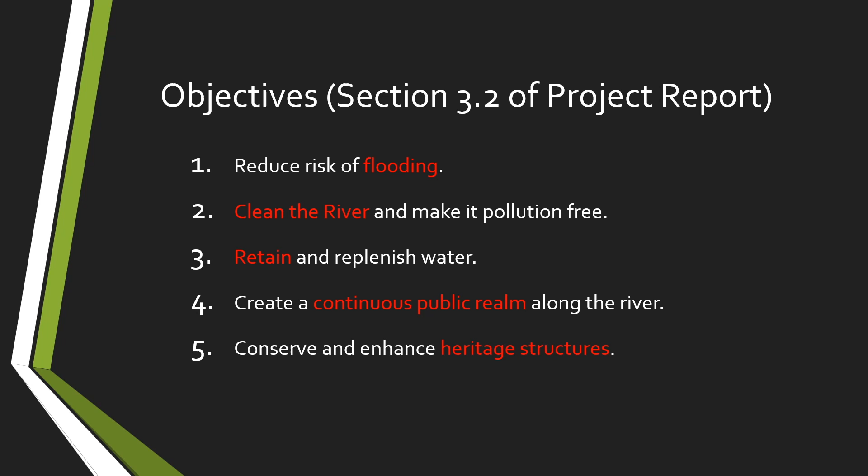But before that, let us see the present status of the river. As of now, water supply to the city from various dams is 1350 MLD, that is million liters per day. As per our estimate, groundwater extraction every day is 310 million liters. So total consumption is 1660 MLD. As per CPCB norms, 80% of the consumption gets converted into wastewater, that is sewage. So as per their norms, our sewage generation every day is 1328 MLD.

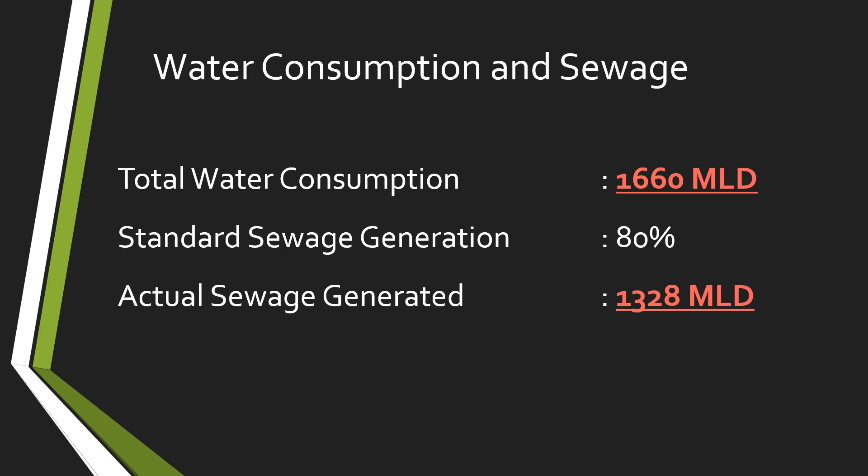As of now, our sewage treatment capacity is 507 MLD. Current sewage treatment capacity of all operating STPs of corporation. They have proposed a new project, that is JICA, you mentioned some time back. Total capacity, proposed capacity of JICA is 396 MLD. Current capacity plus proposed capacity, it comes to 903 MLD.

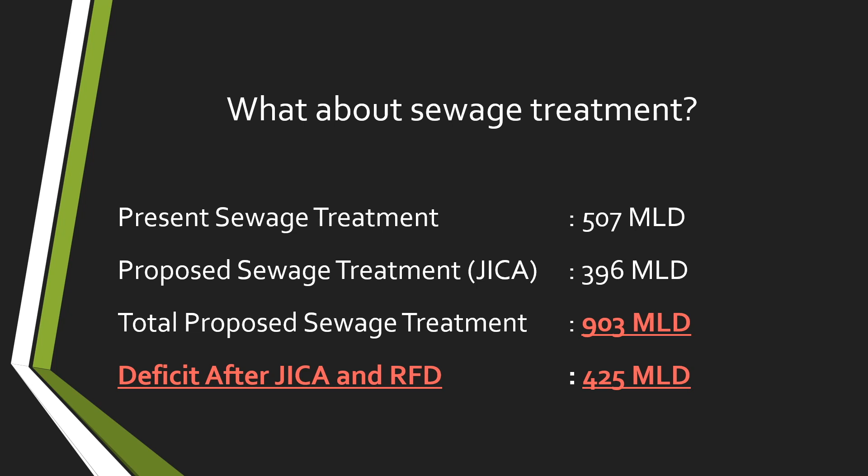But even after completion of JICA, which is going to be completed in, say, the next 5 years' time, keep aside increase in population, keep aside increase in daily consumption of water, even if we consider today's sewage generation, there will be a deficit of 425 MLD in sewage treatment. So, even after completing JICA project, we would be discharging 425 MLD, that is 42,500 tankers of raw sewage in the river every day. In short, even after completion of these projects, the water in the river is going to remain highly polluted.

We must think of the impacts we are causing on the downstream side, particularly Ujni Dam. On the downstream, it is Ujni Dam on Bhima River. Mula Mutha is a tributary of Bhima. Only one species of fish can survive, that is tilapia. And it can survive practically in sewage. Earlier there were 70 species. Now only one species survives. And that also is not a native one.

The fishermen are suffering with innumerable skin disorders. The water cannot be used for agriculture purpose. Cattle are suffering from various diseases because they drink this water. Not only that, even the human beings, particularly this belt is now being known as kidney stone belt, because there are many cases of kidney stone. Then digestive system disorders, particularly cancers of digestive system and impotency. These disorders are rising on the downstream side. That is mainly because of the pollution we are discharging, and in a way, Pune and Pimpri-Chinchwad is responsible for this.

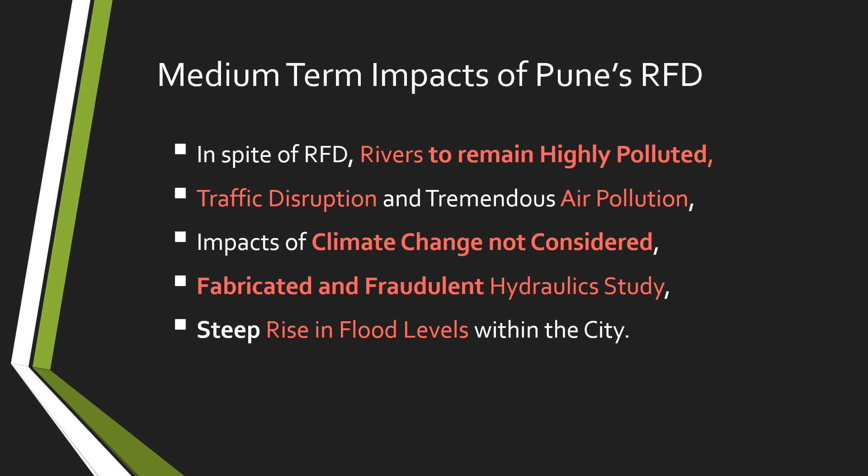So what are the impacts of this project? In spite of riverfront development, as I have explained, rivers remain highly polluted, traffic disruption and tremendous air pollution, impacts of climate change are not considered at all, fabricated and fraudulent hydraulic study, steep rise in flood levels within the city, flawed environmental clearance, depletion of groundwater, irreversible destruction of biodiversity, floodlines illegally shifted to accommodate riverfront development, and monetization of river lands and public resources just to fund this project. So let us go into it one by one. City traffic disruption and rise in air pollution.

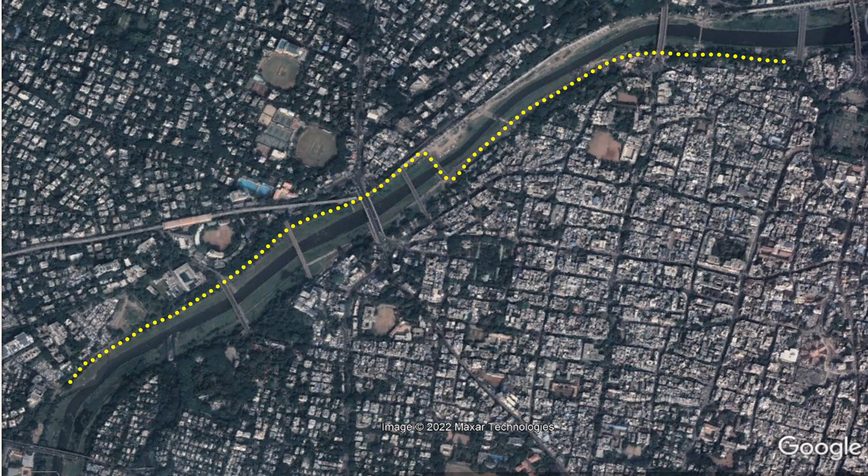This is Lakdi Pool. Malum hai na Lakdi Pool? Yeah. This is, in a way, the center of the city. These are the petas. This is the old core city. You can see this is Shaniwar Wada. Okay, this is Jangli Maharaj Road. This is Ferguson Road. This is Karve Road. Okay, and this is Mutha River. It flows in this direction. Right? See the bridges 1, 2, 3, 4, 5, 6, 7, 8, 9. 9 bridges are there in one frame.

Now, this is a riverbed road. It starts, this is Mhatre Bridge. It starts from here, comes up to, this is Baba Bhide Pool near Jangli Maharaj Road. Then it goes like this almost up to Shaniwar Wada. And in the morning, thousands of two-wheelers, mostly two-wheelers, cars also, travel from this end to this end. I mean, from the Kothrud area, Erandwane area to the core city. Thousands of vehicles travel in this direction. And they come back in the evening.

Now, it's another question whether a road should be built in riverbed or not. That's a debatable question. But as of now, that road does exist and thousands of citizens use this road. I came by that road right now.

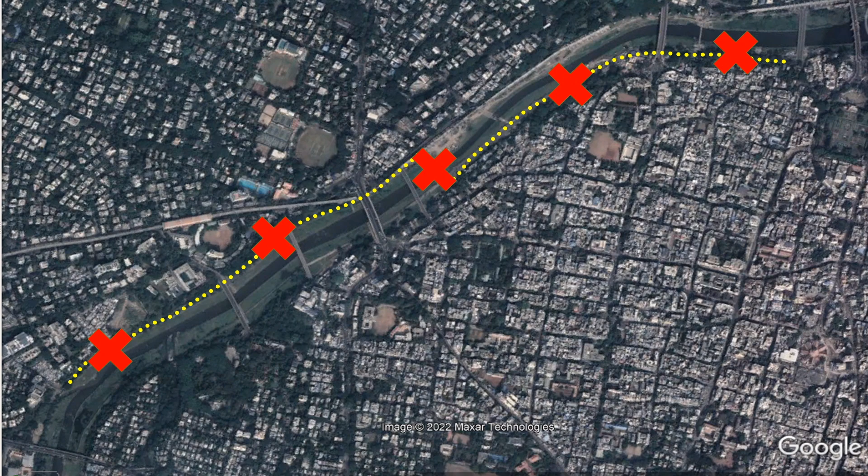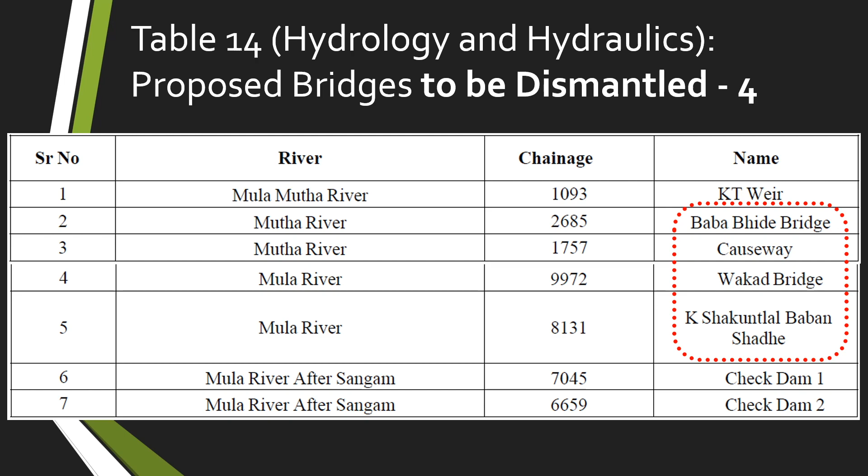Not only this, 4 bridges are going to be dismantled: 2 bridges on Mutha River, 2 bridges on Mula River. Now this is a table I had directly copy pasted from their DPR. This is not prepared by us. So one of them is Baba Bhide Bridge. So these bridges are going to be dismantled forever.

7 bridges are going to be elevated at the same location. Now they have not gone into details whether it is possible or not, what traffic obstruction it will cause, what disruption it will cause, whether it is possible, which technology needs to be adopted to elevate the bridges. Nobody has gone into those details.

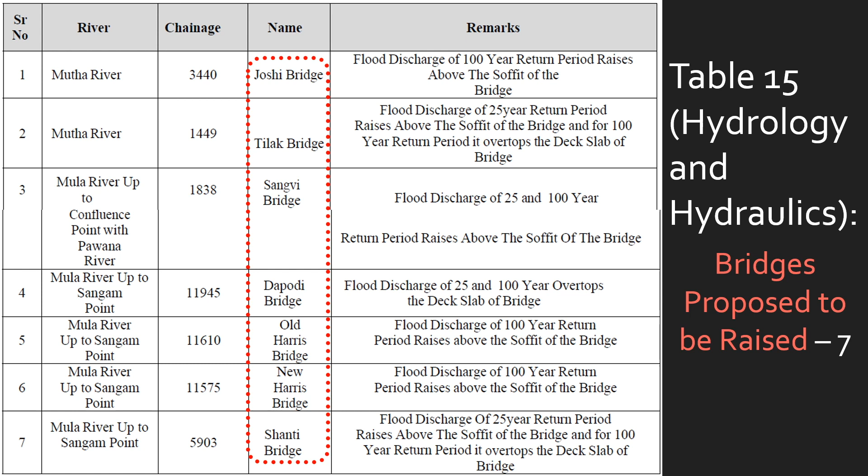Now let us see this Tilak Bridge. Tilak Bridge is a bridge just beside Pune Municipal Corporation. Now they have given water surface levels and details of the bridges also. This is Tilak Bridge. Bottom soffit of the bridge is at 545.98 meters. These levels are from mean sea level, MSL. So 545.98 meters above MSL.

And the output of Mutha River up to Sangam from HEC-RAS, that's a software they have used, for flood discharge of 100-year return period in channelized section. Channelized section means after completion of the project, they are going to channelize the river. So after completion of the project, at Tilak Bridge, WS elevation, water surface elevation, is going to be 547.93, almost you can say 548 meters.

Okay, so 546 meters and 548 meters. There is a difference of 2 meters. In short, you will have to elevate that bridge by 2 meters to see that it doesn't cause any obstruction, it doesn't cause any impediment to the flow of water.

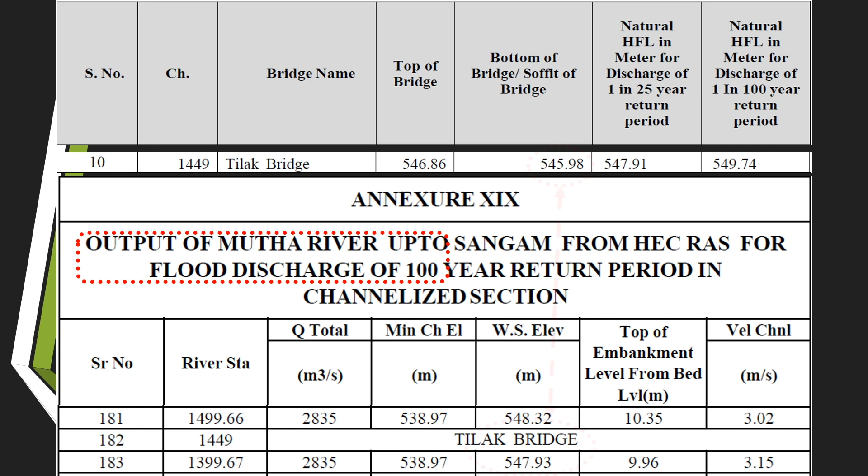Now, no consideration of climate change. In 2009, central government directed all state governments to study the impact of climate change in their own states and come out with their mitigation plans, adaptation plans. Maharashtra government gave that work to TERI, that is Pachauri's Institute in Delhi. They filed a report in 2014.

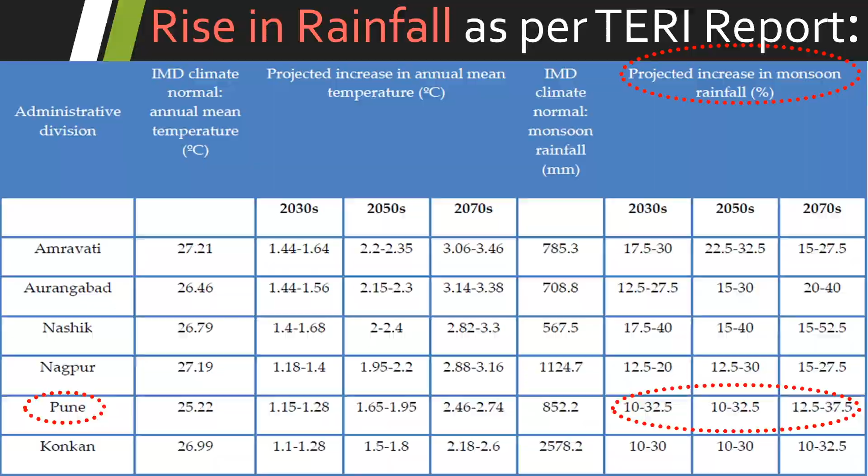In that report, they also have mentioned key recommendations for water resources sector: conservation and renaturalization of rivers and water bodies. Conservation and renaturalization of rivers. This project is completely diametrically opposite of this. There is no conservation and renaturalization.

Further, they also have said retain and conserve the riparian zones and renaturalize existing wetlands. Enhance native vegetation, formulate stringent policies to prevent the dumping of debris and waste in these zones. Retain and conserve riparian zones and renaturalize existing wetlands. They are completely reclaiming the wetlands by constructing walls and reclaiming the wetlands on the outer side of the wall. Hundreds of acres, if not thousands.

There will not be a single square foot of wetland. No native vegetation. And this project is nothing but dumping debris and construction on these wetlands and riparian zones. So it is totally violating these norms given in this report.

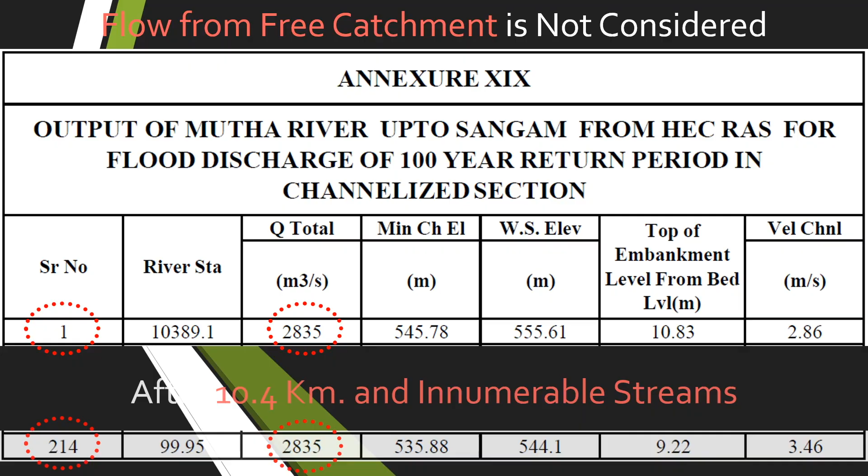See, this is the first reading of Mutha River. They have considered 2835 cubic meter per second, and this is the last reading after 10.4 kilometers. It's the same reading. In between, there are innumerable streams. I will tell you about one single stream, that is Ambil Odha. In 2019, Ambil Odha flooded and 26 people lost their lives. It has a maximum carrying capacity of 650 cumecs. One single stream, that is not considered, between this and this location. And there are many such streams. As per our calculations, the flow from free catchment area is more than the discharge of Khadakwasla Dam.

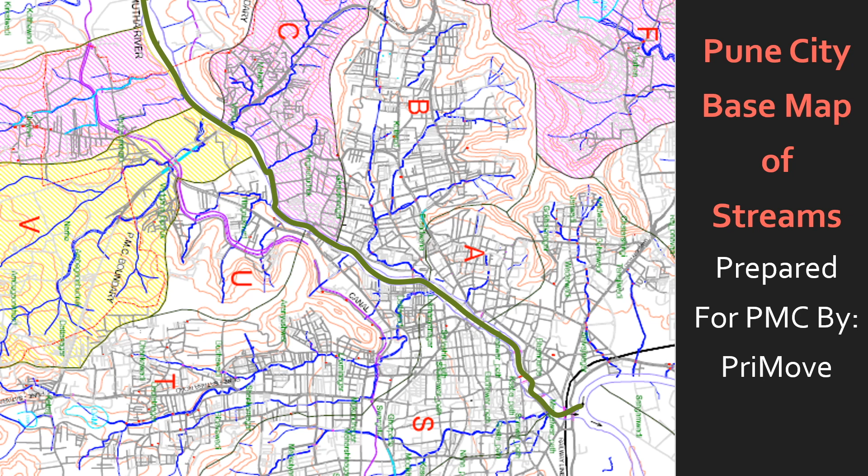So fine. This is Mutha River. This is Sangam. This is Mula River, and this is Mula Mutha River. See the streams. All these blue lines are various streams. This is a map prepared by PriMove organization for the corporation, so the corporation has all this map. They have not considered a single drop from all this area.

And what does the law say? This is the circular by Water Resources Department, dated 16th November 15. For demarcation of restrictive zone, that is the red line, flood to be considered is as under. This is for river without dam, and this is for river with dams, which is our situation. All these rivers have dams on the upstream side. Spillway design flood plus 100 years return period flood from the free catchment area below dam up to point of study. Spillway design flood means the peak discharge of the dam, and the 100-year flood from the free catchment area they have not considered at all, and they have accepted it.

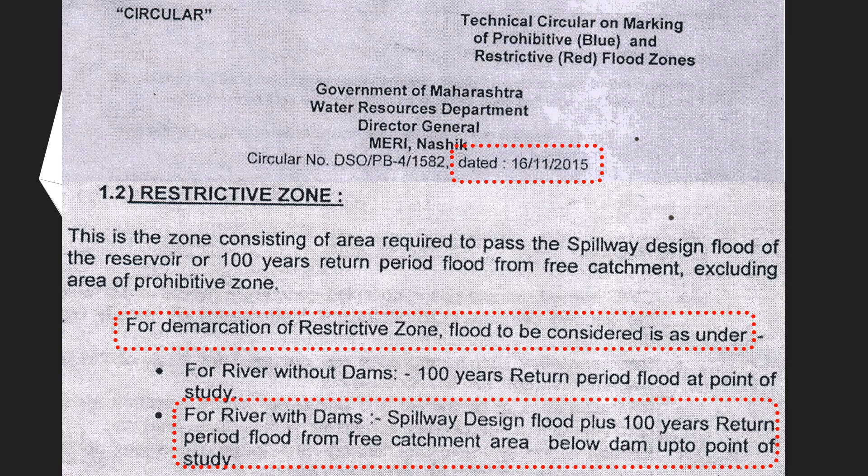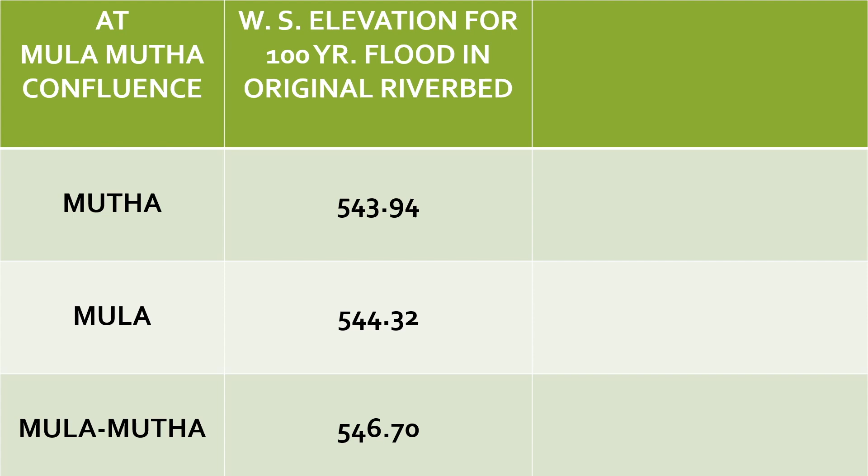They have that figure, but this is on the too conservative side. The actual figure is much more than this. But whatever it is, they have not considered anything from this. So how can you expect that the flood levels will recede?

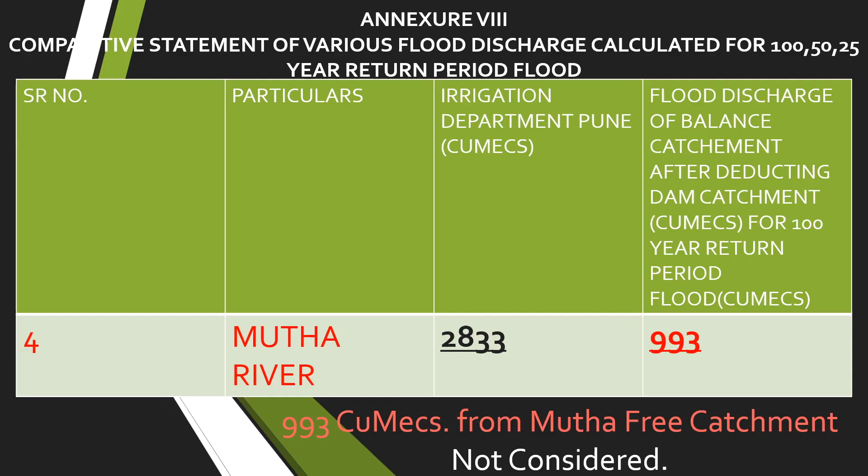Now see, Mutha River meets Mula River, and after that it is called Mula Mutha River. At confluence, the water surface level for 100-year flood is 543.94 meters in Mutha River, just before the confluence. In Mula River, it is 544.32. This is as per their study, I don't say it is the factual situation. And in Mula Mutha River, it is 546.70 meters.

Now do you see any contradiction in this? Now, water surface elevation for 100-year flood in channelized section - I'll come to that point. After channelization, Mutha River will be flowing for the same flow at 544.10 meters.

Means there will be a rise in flood level by 16 centimeters. In Mula River, which we have seen earlier, the rise is 1.53 meters. And in Mula Mutha River, the flood level goes down by 5 centimeters, means 2 inches. This is as they have claimed. All these figures are from their DPR. I am just correlating these figures.

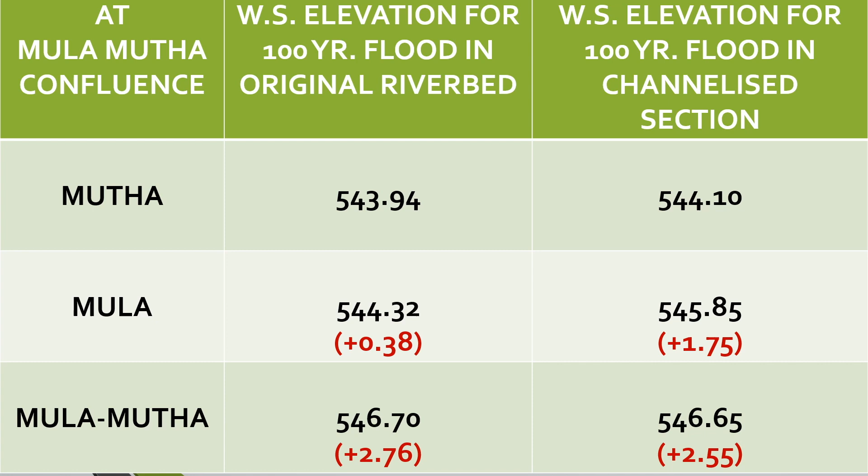The water flows down. The water doesn't climb up on its own. So what will happen? This is the Mutha River, this is Mula River, this is Mula Mutha River. At this juncture, water level is 544.1. Here it is 546.65, 545.85. Now forget about this, let us consider only these two rivers.

So what happens? In their drawing portfolio, they have shown like this - the water flows down, down, down, down. Here it climbs up and again starts flowing down. This is a longitudinal section, drawing portfolio, page number 43.

So actually what will happen? They should have done the reverse calculation. If the water level at confluence is this, then Mutha River's water surface elevation will start going up from this point, like this. So the actual level of Mutha will be like this. Now see how many bridges will be submerged.

Now, out of this I have drawn only this line. All these figures, this drawing, is from their DPR.

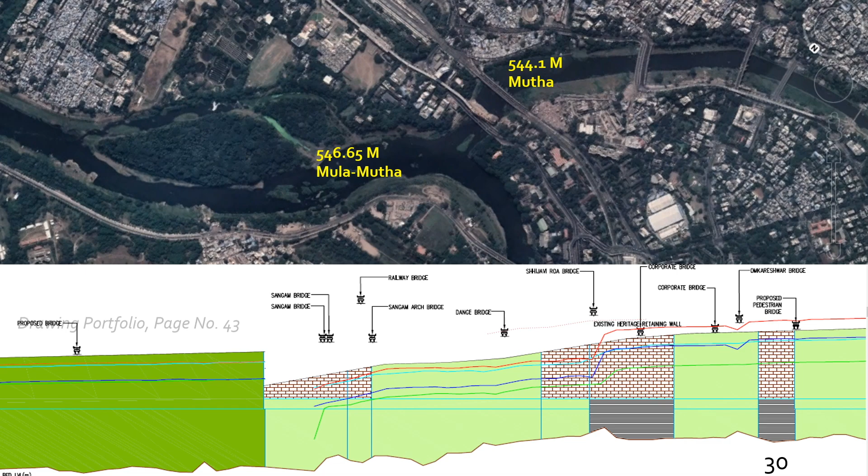Same case with Mula River also. So this is Mula River, this is the location of its confluence with Pawana River. It flows down, then it goes down, then again comes up. And see, it's much above this. How can it happen?

Water never climbs up on its own. So the actual water level will be like this. All these bridges will be submerged.

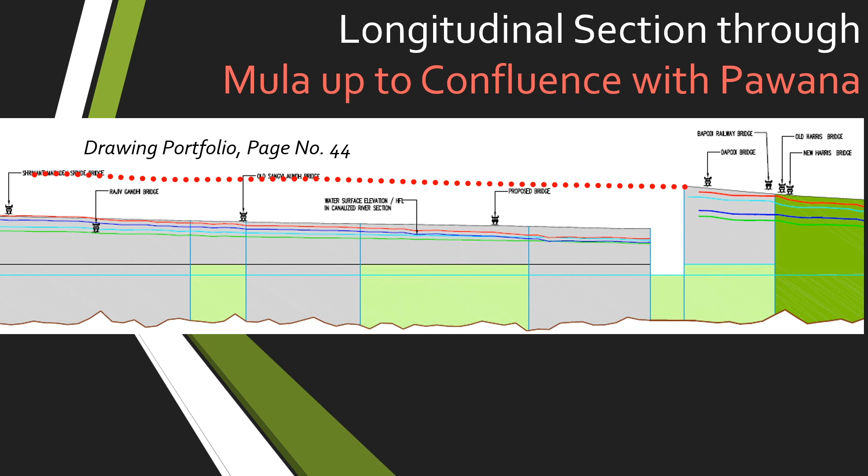So this is the way they have conducted their hydraulic study. Now this water surface elevation of Mutha at Sangam has to be a little higher than Mula Mutha, that is higher than 546.65. We have seen that at Sangam, Mula Mutha river will start flowing, first point is 546.65.

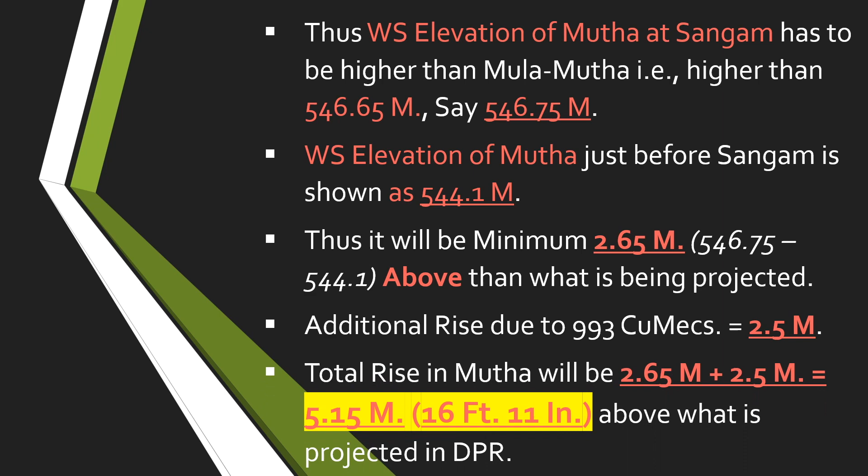This is the original riverbed cross section from their own DPR. This is the once-in-100-years flood line, the red line, and the once-in-25-years flood line, the blue line. This is the total natural width of the riverbed.

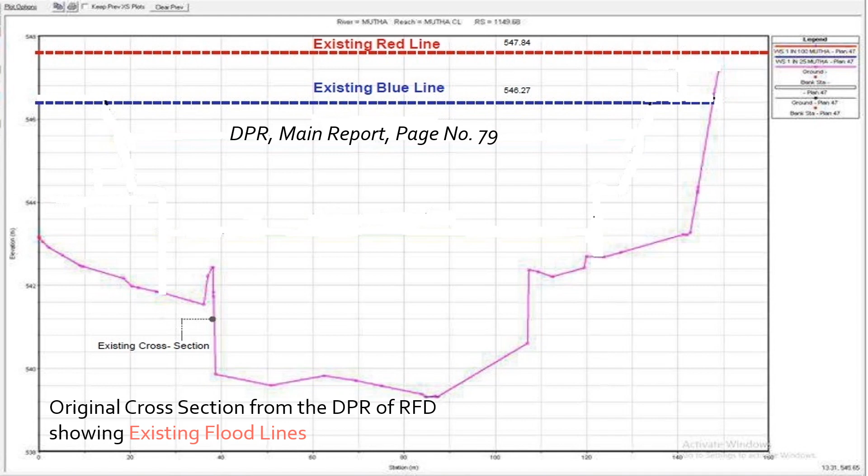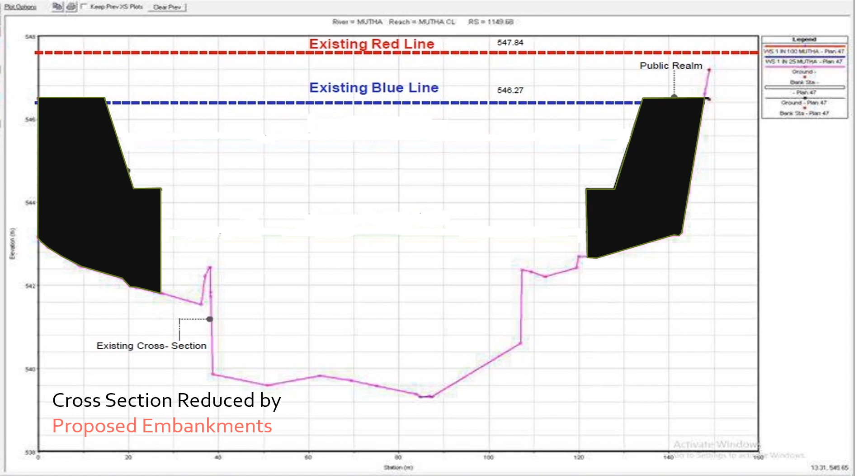Now they are going to construct concrete embankments on both banks, and these embankments will be completely filled with soil on the backside. These floodplains are going to be reclaimed to create artificial gardens on this face, and it can be used for various purposes. Now what they claim is that after reducing the width of the river from this to this, the flood levels will come down.

It is said that the flood levels will come down. The existing red line will come down by 2 meters, even below the earlier blue line, and the blue line will come down by 3 meters. So the water carrying cross section will become this much. How is it possible? This is another cross section.

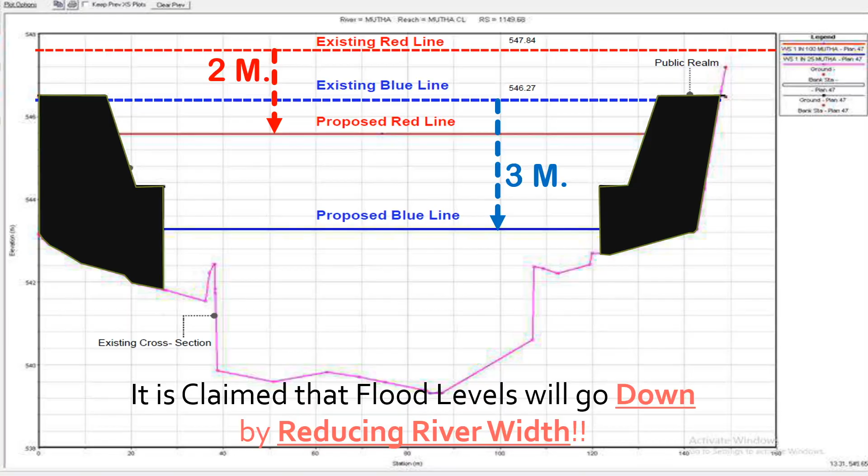This is the original profile of the riverbed, this dotted line. Now these floodplains will be reclaimed with embankments and soil. These artificial reclaimed lands will be used for food plazas, restaurants, parking, pathways and whatnot. It will be commercialized, and the natural width will be reduced from this width to this.

This is another cross section. Now this is the natural riverbed, and these are the proposed embankments. At many locations in the city, these embankments are above the surrounding ground level.

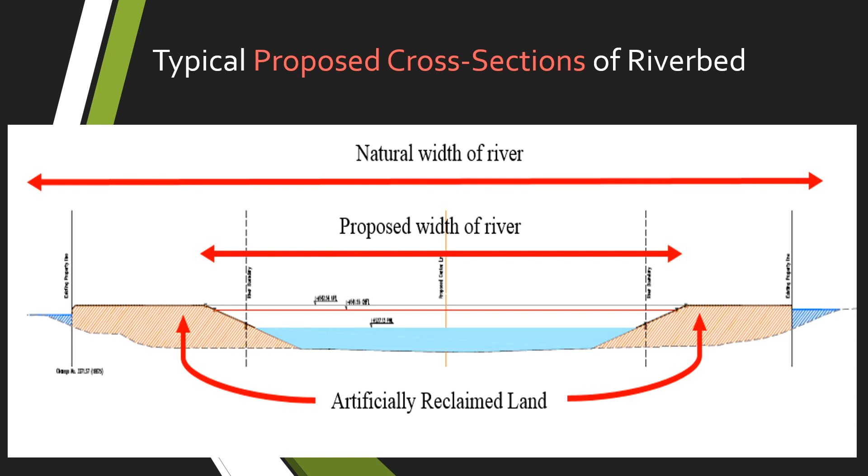Now a river is not a canal that carries water from point A to point B. At many places, there are streams, and not only streams, but surface water also comes to the river. What will happen to that surface water if these embankments are above the ground level? This surface water will get stagnated on the outer side, and this will cause pluvial flooding. Flooding because of flowing water is fluvial flood, and flooding because of stagnant water is pluvial flood. So there will be pluvial flooding at multiple locations in the city.

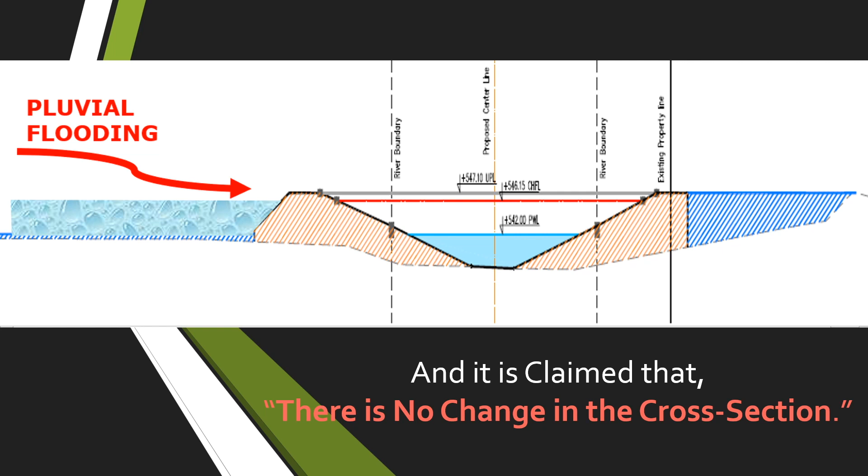Now from 150 meters, they are bringing down the width to 90 meters. So they are reducing the river's width by 60 meters.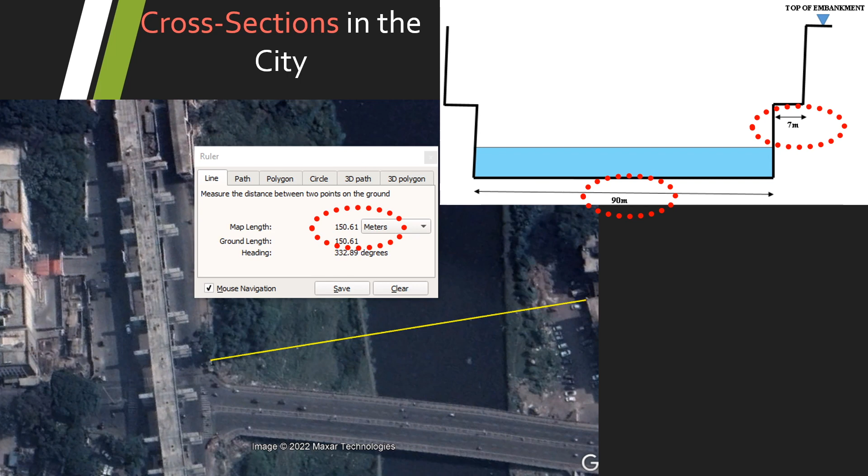And they say that the flood levels will go down. So a 60 meter wide land on both these banks will be reclaimed. 60 meters wide, 30 and 30 meter wide floodplains, all these are floodplains, will be reclaimed and used for commercial purpose.

See how shoddy their drawing portfolio is. Blue is the color used for water. Now this is the cross section. Is it possible the water cross section will be like this? Will water remain at such a fluctuating level? This is the way they have prepared the DPR, and it is sanctioned without giving any thought, without even looking at it.

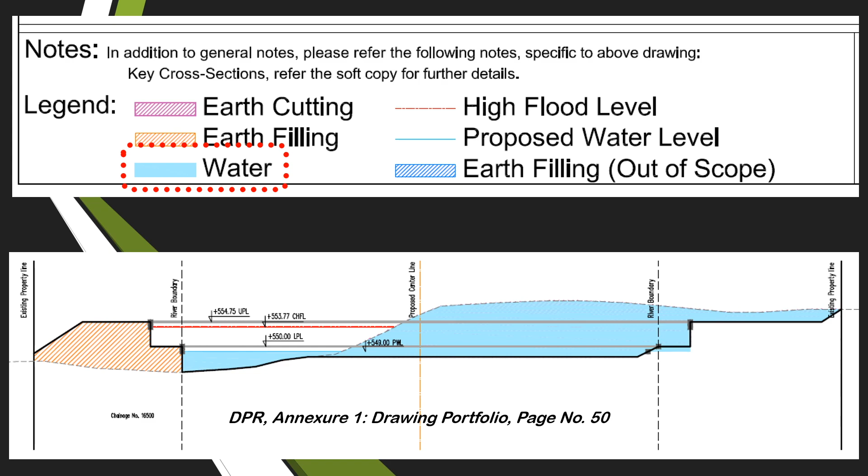Anyway, in 2020, the commissioner's letter from the PMC commissioner to the chief secretary of water resources says that the cross section of the river will be increased. Whereas this is a 44 kilometer long project, 44 kilometers on the left bank and 44 kilometers on the right bank, totally 88 kilometers. So nowhere in these 44 kilometers is the cross section of the river going to be increased.

Everywhere the river will be pinched. They have shown the embankments with reduced width, and yet the commissioner says that the cross section of the river will be increased. This is an utterly false statement, misleading and misguiding statement made by the commissioner. It's a criminal statement.

Indian standard guidelines for planning and design of river embankments. We have seen that they are constructing the embankment right on the riverbed, on the floodplains. What does the Indian standard say? Alignment and spacing of embankments: embankments should be aligned on the ridge of the natural banks of the river, where the land is high. So these Indian standards are also being completely flouted.

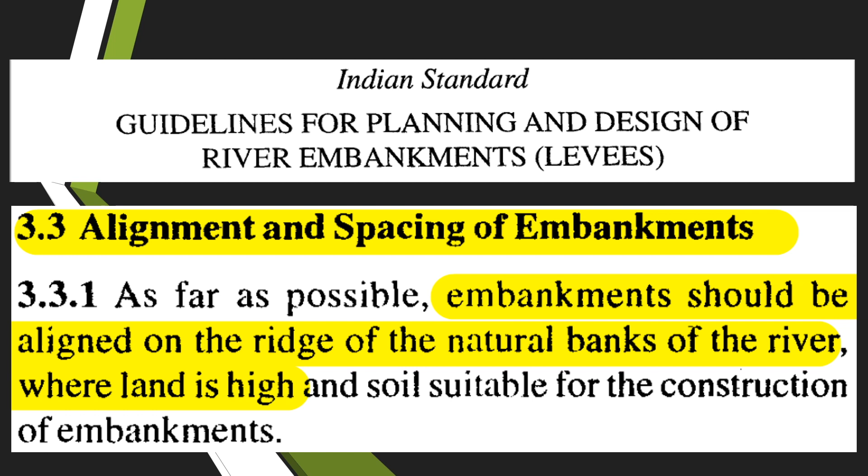Correspondence from Water Resources Department and CWPRS. This is a letter written by Water Resources Department in 2018. Floodline maps were handed over to PMC in 2010 and 11. As these discharges and floodlines are final, there is no question of our approval to any other report prepared by any private organization and checked by CWPRS.

They had sent this project for checking to Irrigation Department. Irrigation Department flatly refused, saying that whatever floodlines we have given in 2010 and 11 are final. We are not going to check anything. In 2019, they gave a letter stating no change is permissible in the flood data and flood lines finalized earlier by Water Resources.

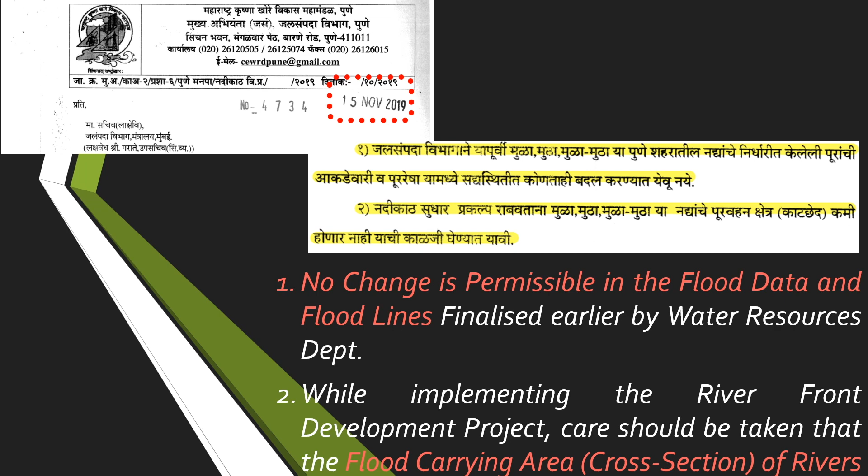While implementing the riverfront development project, care should be taken that the flood carrying area, that is the cross section of rivers, is not reduced. This is a very important statement they have given. Cross section of the rivers should not be reduced. In 2021, the flood discharges and flood lines given to PMC in 2010 and 11 are final.

We have observed variation between these and the reports prepared by private organization and checked by CWPRS. See, this is a very critical statement. Water Resources Department has given all that data and floodline maps in 2010 and 11 to PMC. Now they have observed some variation, tafawat, between the data given by them and the reports prepared by the private organization, that is the project consultant, and which are checked by CWPRS.

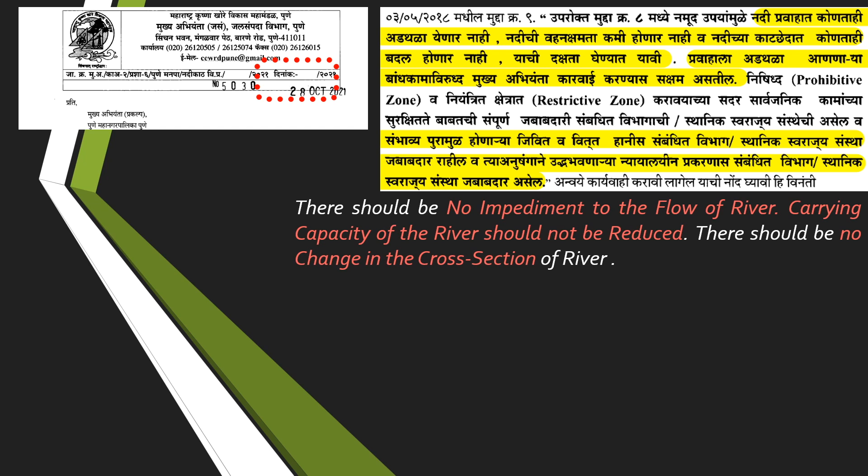In 2021, again in October, Water Resources Department said there should be no impediment to the flow of the river. Carrying capacity of the river should not be reduced. There should be no change in cross section of the river.

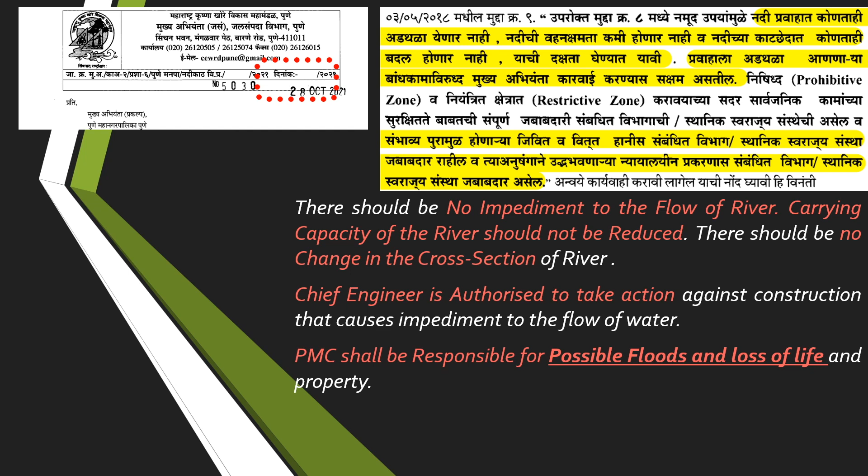Chief Engineer is authorized to take action against construction that causes impediment to the flow of water, Chief Engineer of Water Resources. PMC shall be responsible for possible floods and loss of life and property. So they have clearly indicated that there is a possibility of floods if you implement this project. Further, they have said that PMC shall be responsible for any further litigation in this context. They are expecting litigations also, which are going on.

PMC submitted their hydraulic report to CWPRS and asked for their verification. In 2017, CWPRS gave them a letter stating that in light of above facts, CWPRS clears the report. They have not cleared the project. They have cleared the report on whatever data was furnished by PMC, in which Irrigation Department has found variation. So CWPRS clears the report on hydrology and hydraulics of the RFD project.

This letter was given by CWPRS in 2017. When we asked, CWPRS is the topmost organization, Central Water and Power Research Station. It is near IAT, Sinhagad Road, Institute of Armament Technology. Just before that, this CWPRS is there. So they have cleared the report in 2017.

We asked them, on what grounds have you cleared the report? In 2021, they gave us a reply that CWPRS did not conduct any study for RFD of PMC. They have not conducted any study, and CWPRS is not the clearing authority in this matter. And PMC has continued everywhere stating that CWPRS has given clearance, CWPRS has given clearance, whereas CWPRS has not conducted any study. Now, this is an illegal and flawed environmental clearance.

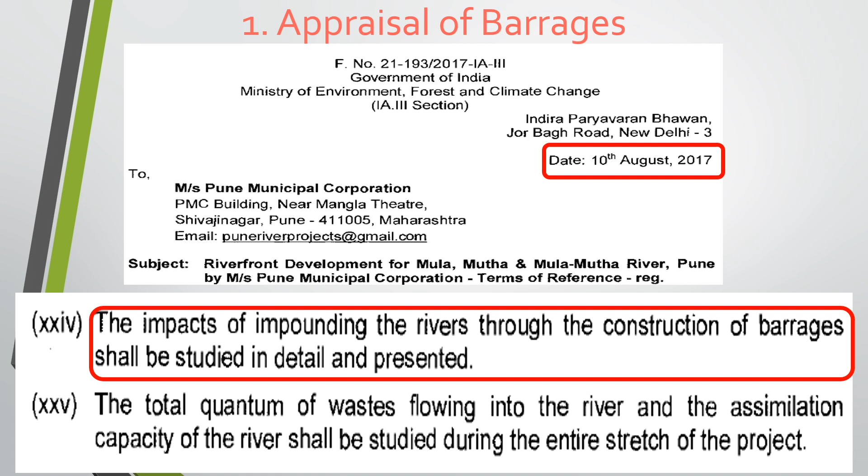Now, PMC did not conduct any assessment of those barrages, and without that, in spite of the TORs, environmental clearance is given by SEIAA. SEAC recommends the proposal. SEAC issues the terms of reference. Then based on that, EIA, environment impact assessment, is done. It is submitted to SEAC. SEAC studies it, and if they find it satisfactory, they recommend to SEIAA, State Environment Impact Assessment Authority, which is also under central government, and SEIAA in their meeting issues the environmental clearance.

So, though PMC did not conduct any impact assessment of these barrages, SEIAA issued the environmental clearance stating project proponent informed that there are 4 barrages to be constructed at following places A, B, C and D. As the committee has no expert working in this field, committee has not gone into this aspect. Proper appraisal from proper authority in this regard is solicited.

It is unbelievable. Basically, SEIAA issues environmental clearance to huge dams and huge projects, airports and ports and factories, and they don't have any expert to assess the impacts of barrages. It's unbelievable. They just didn't want it. Matter is simple. And till date, no appraisal of barrages is conducted by PMC, and they are going ahead with the project. They have floated the tender and they have issued the work order because they don't want to go into the details of barrages.

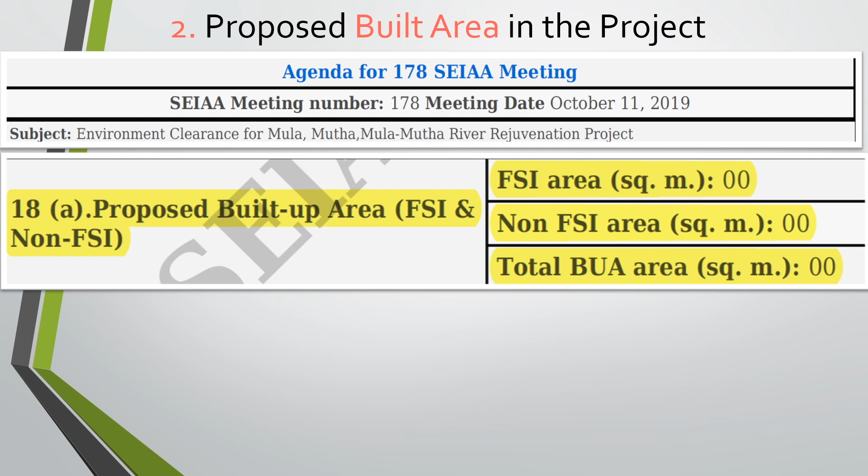When we check the basic estimate of this project, actual built up area proposed FSI and non-FSI is 22.5 lakh square meters. 1 square meter is 10.764 square feet. It is 556 acres of built area. 80% of the estimated cost goes in concretization and constructions on riverbed. Remaining 20%, some pipes and landscaping.

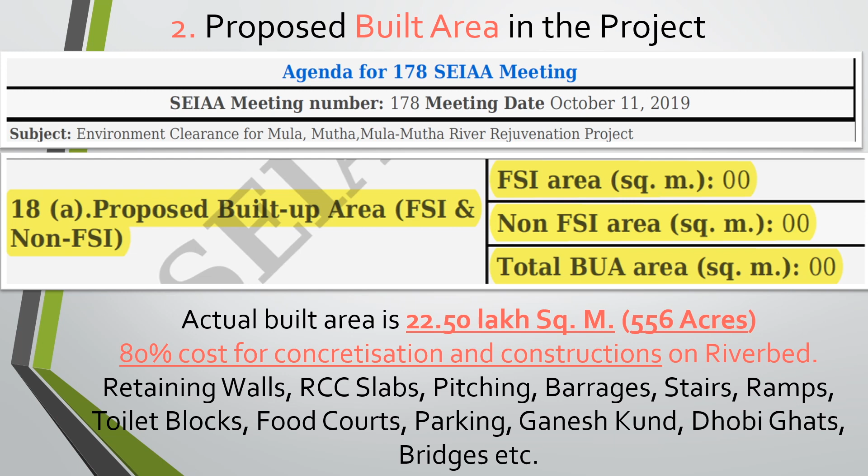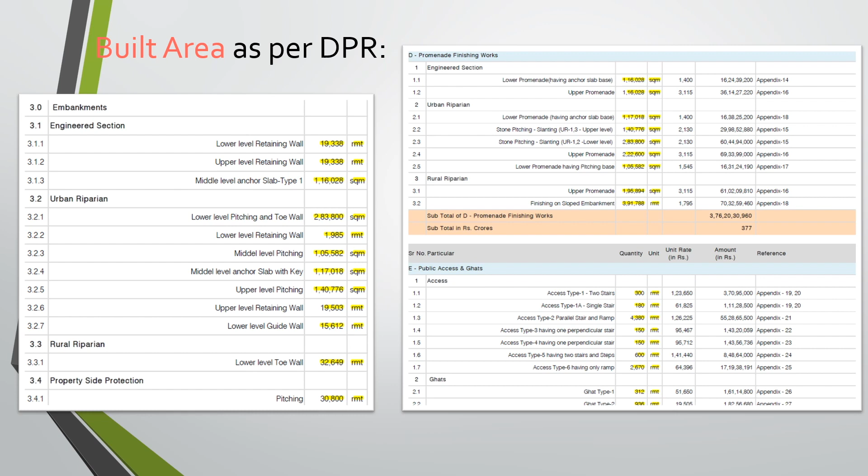So retaining walls, RCC slabs, pitching, barrages, staircase, ramps, toilet blocks, food courts, parking, Ganesh Kund, Dhobi ghats and bridges. All these are the civil constructions on the riverbed. And they have said that the proposed built area is 0 square meters. See, middle level anchor slab 1,16,000 square meters, low level pitching 2,83,000 square meters, upper level pitching 1,40,000 square meters. See this finishing and slope embankments 3,91,000 square meters. So lakhs of square meters.

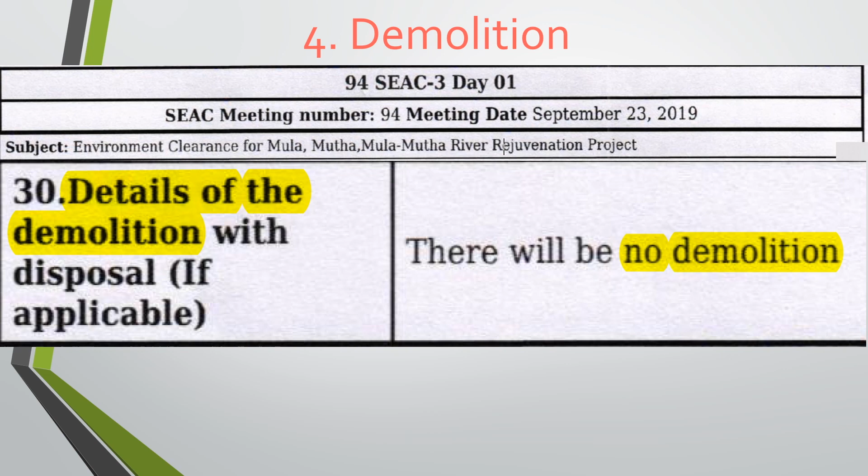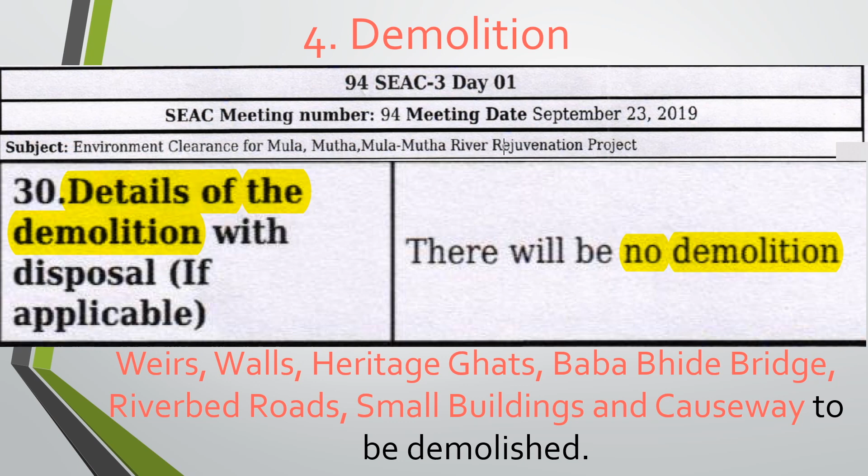Demolition, details of demolition with disposal: there will be no demolition. In estimate, they have provided a lump sum amount of something 8.5 crores for demolition. Weirs, walls, heritage ghats, Baba Bhide Bridge, riverbed roads, small buildings and causeway are to be demolished. But what they have said, there will be no demolition. So it's a completely fraudulent environmental clearance.

Deepening. What SEIAA has mentioned in their minutes: during discussion, project proponent informed that no activity pertaining to deepening of river will be undertaken as a part of this proposal. But this is again their drawing portfolio. This purple color is earth cutting. Now see that color. Throughout the width, they are deepening the river by minimum 2 meters. See, this 2 meters is given here.

Here, see the massive earth cutting. This is minimum 6 meters or something like that. So they are deepening the river. So in short, this DP environmental clearance is based upon completely fraudulent information furnished by the project proponent and their consultant.

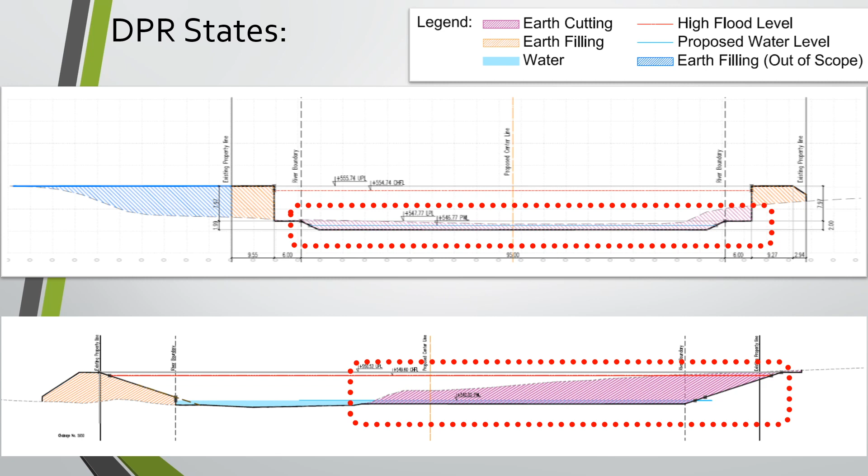They are constructing RCC retaining walls, embankments on both the banks like this. This is the natural profile of the river bank. They are going to cut it into steps and filling over here. Now, there are two types of aquifers. Some aquifers discharge water into the river, and some aquifers take water from the river.

Generally, aquifers coming from the hilly area, they bring water and they discharge. And these lower aquifers generally take water to wells and groundwater. So there are discharge zones as well as recharge zones. All these zones will get completely cut off because of these RCC walls, perpetually, irreversibly.

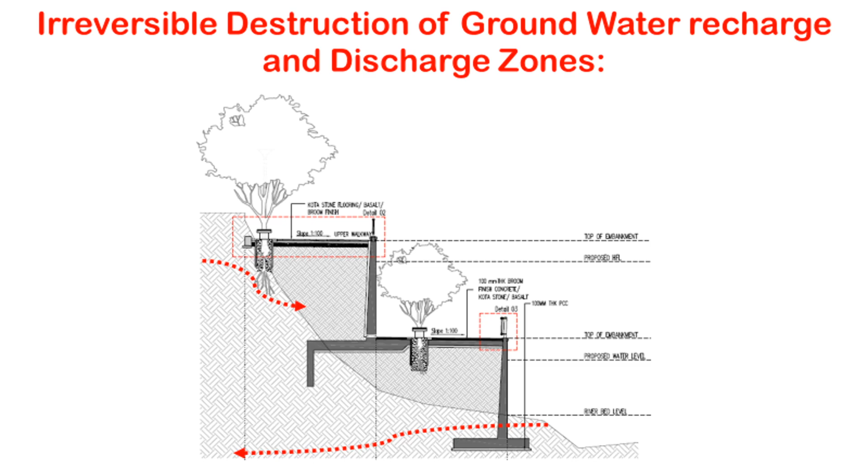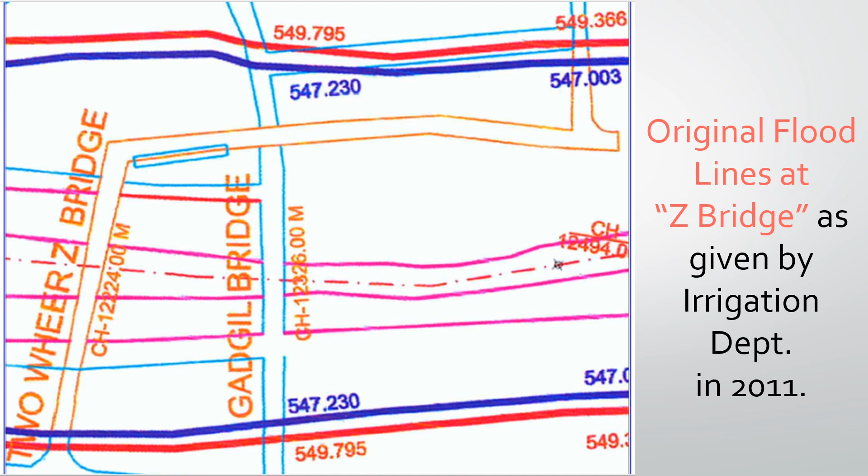After that, on 2nd March 2015, Irrigation Department came up with a circular that approval to the maps of floodlines and flood zoning should be given by concerned chief engineer. Only chief engineer of Irrigation Department can approve the flood maps. Authority to approve these maps cannot be delegated to the officers below the rank of chief engineer. No officer below that rank can approve these maps.

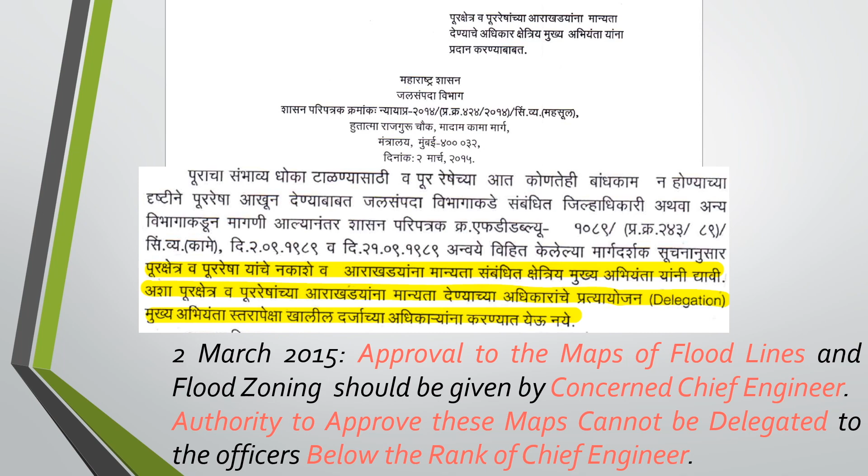In 2015, they came up again with another circular: the marking on maps regarding floodlines and on ground shall be cross-checked by ground truth verification. After verification, the regional chief engineer shall sanction the maps. So again, the authority is properly defined that chief engineer has to approve the floodline maps. In spite of this, one executive engineer issued floodline maps to PMC to incorporate the floodlines in the DP maps. These maps were not approved by the chief engineer.

See, on 22nd of July 2016, though these circulars were issued in 2015, in spite of that: subject regarding Mula and Mutha rivers floodline maps to be incorporated in the DP maps. Signed by Executive Engineer, Khadakwasla Irrigation Division. Okay, Karyakari Abhiyanta. Now these are the floodline maps issued by only executive engineer's signature.

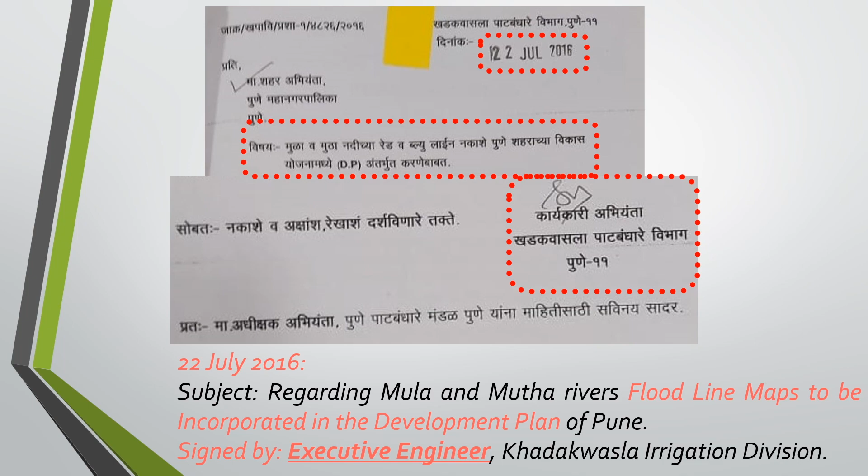This is Z Bridge. Okay, like this. This is Narayan Peth city area. This is Jangli Maharaj Road. Now, if you see the earlier original map, the floodlines were here, much away from this Z Bridge. And this side, the floodlines were at the beginning of the Z Bridge. Okay, these floodlines have been shifted now towards the center of the river to accommodate this dumping and this project.

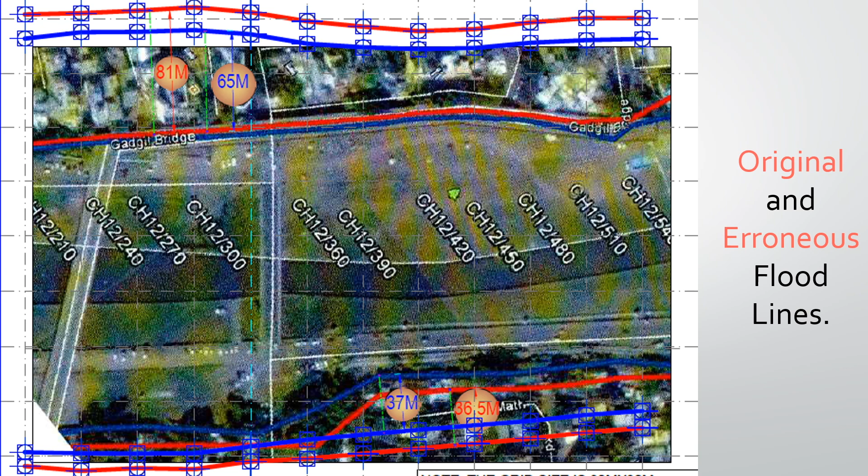Now we superimpose these floodlines and the original floodlines in AutoCAD and check how much is the variation. Red line is shifted towards the center by 81 meters, blue line by 65 meters, and on this side it is 37 and 36.5 meters. 81 meters is almost 270 feet. So the floodline has been shifted by 270 feet without approval. And not only that, at many locations, actually these are floodplains. No construction should be allowed here. These are the old buildings.

When we asked in the irrigation department whether chief engineer has approved these flood lines, chief engineer's approval letter to Mutha River's floodline maps prepared by GIS, we got a reply that such approval letter is not available in the office. So chief engineer had not approved these lines. The chief engineer came to know that earlier executive engineer has issued fraudulent maps to PMC.

They immediately wrote a letter to PMC in 2020 that GIS based floodline maps were handed over to PMC in 2016 to incorporate in the DP maps, but now the floodline maps submitted in 2011 shall be considered as final. So they made their side very clear. Though we had given the maps in 2016, cancel it, and 2011 maps should be considered as final. In spite of that, PMC has started issuing building permissions.

Now see, this is riverbed. These are the floodplains. This building and this building. These are old buildings. The position of blue line is somewhere here. Now this building is coming up completely on floodplains, completely inside earlier original blue line. This is a 16-storied building with some 3 basements.

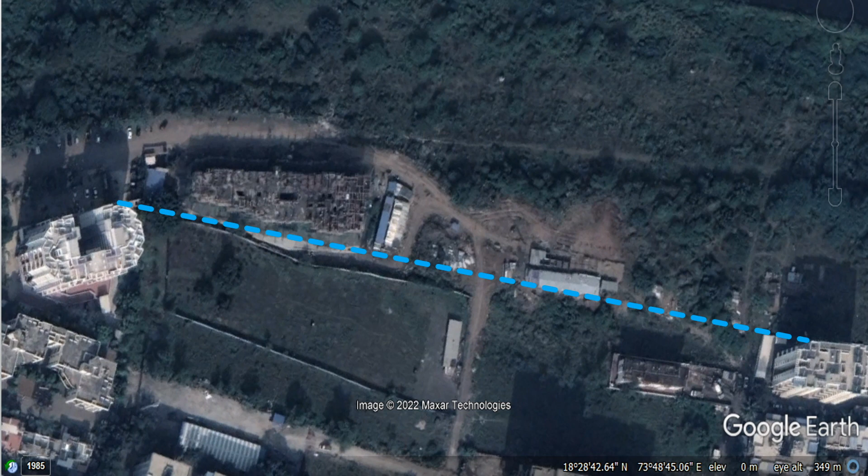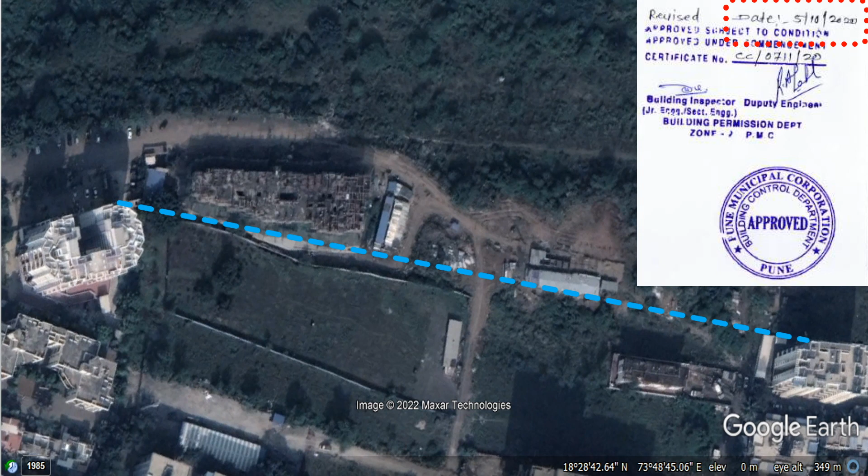So what will happen? And this is approved in 2020. I mean, after the irrigation department told PMC to cancel the 2016 flood lines, they have issued these revised plans.

We have filed a PIL in Bombay High Court against these fraudulent flood lines. In that PIL, the state government has filed an affidavit saying the state government, after consulting the director of TP, will take a decision regarding the modification proposal on merits. So the state government has understood that there is some fraud while marking the flood lines, and they have clearly shown their inclination to modify the flood lines in the DP maps, but PMC doesn't want it.

Now, funding by monetization of river lands. These are the suggestions given in the DPR: project financing, availability of land within floodlines, commercialization of the land within floodlines, availability of government-owned land for revenue generation. There are around 182 acres along the river owned by various government departments. And it is suggested that the development rights of these government-owned lands should be given to private builders to fund this project.

Allow changes in the restrictive zones. These zones are defined by the irrigation department: prohibitive zone, restrictive zone. So these zones also they are proposing to change. So, I mean, to the safety of the citizens, no consideration has been given.

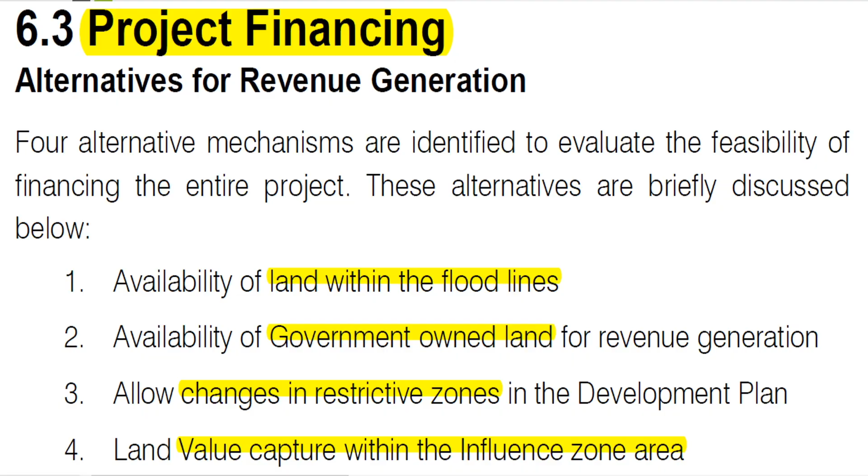In one of our cases in the National Green Tribunal, the PMC Commissioner has filed an affidavit that respondent number 1, that is PMC, undertakes not to permit in future any building construction activities within the blue line. They are violating their own affidavit filed before the court. This is the value given to the judiciary by our local bodies.

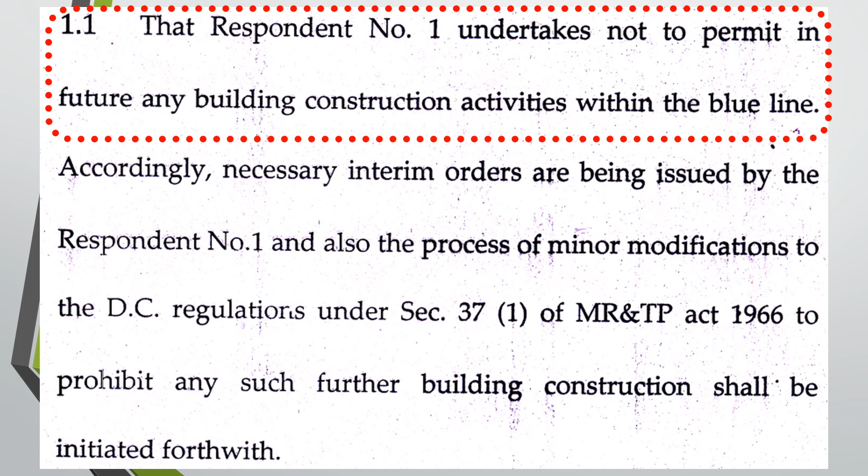So, in short, rivers continue to remain highly polluted, traffic disruption leading to air pollution, impacts of climate change not considered, steep rise in flood levels, irreversible destruction of biodiversity, Water Resources Department directions are not followed, completely flawed environmental clearance, floodlines illegally shifted to accommodate this project, monetization of river land, and violation of the Commissioner's own affidavit. So, these are the salient features of this project.

Many people say that we just don't want the rivers to be rejuvenated. It's not like that. We all want it, but not by concretization and construction. These people have started chain fasting. So these people fasted for one day each. So these are some of the people.

These project consultants conducted a survey in public, asking their priorities. Now, 91% of citizens said that we want good, clean water in the river. 89% said that we want the rivers to flow. 86% said that ecological restoration should be done. 76% said that it should be safe from floods. But none of these priorities are satisfied in this project. So, what citizens want is not considered at all.

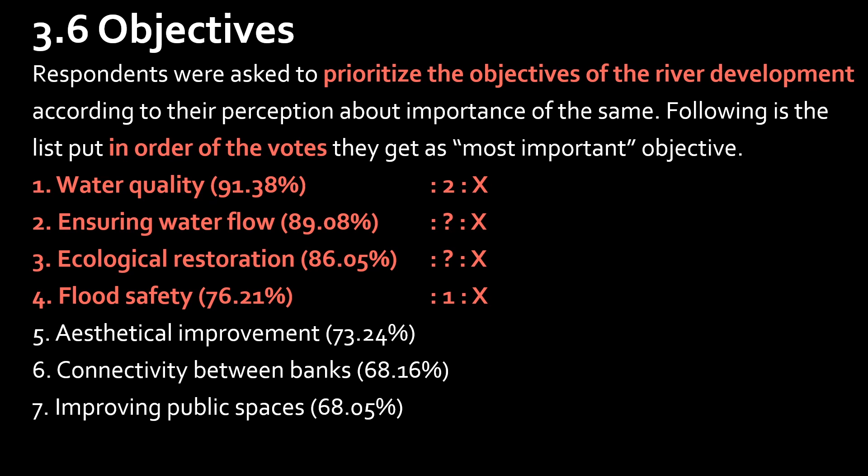Sabarmati has the immediate upstream dam at 130 kilometers from Ahmedabad, whereas we have 7 dams within 25-30 kilometers: Khadakwasla, Panshet, Warasgaon, Temghar, Pawna, Mulshi and Kasarsai. So if these dams, which are very close to each other, start releasing water into the river, within minutes it will hit the city without giving any time for evacuation.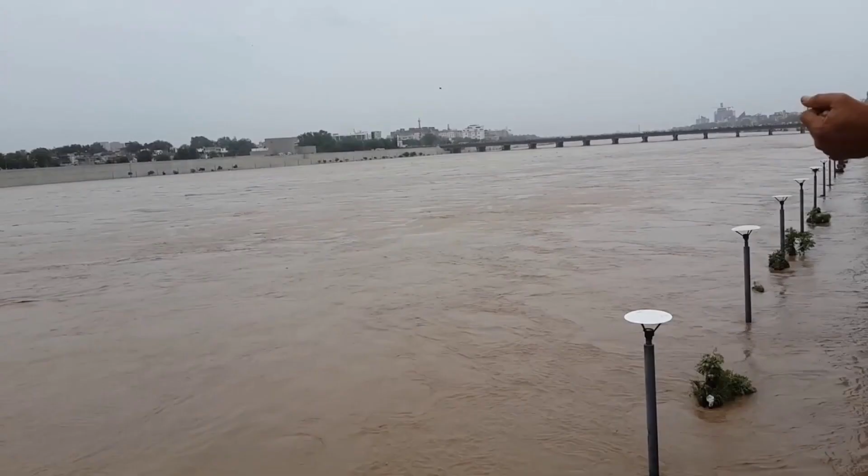Here, the width of the river is 285 meters in Ahmedabad. And here you have seen they are proposing the width to be 90 meters, less than 1/3 of this. See the situation at 285 meters. What will happen if the width is 90 meters? This is flooding. This is water hyacinth.

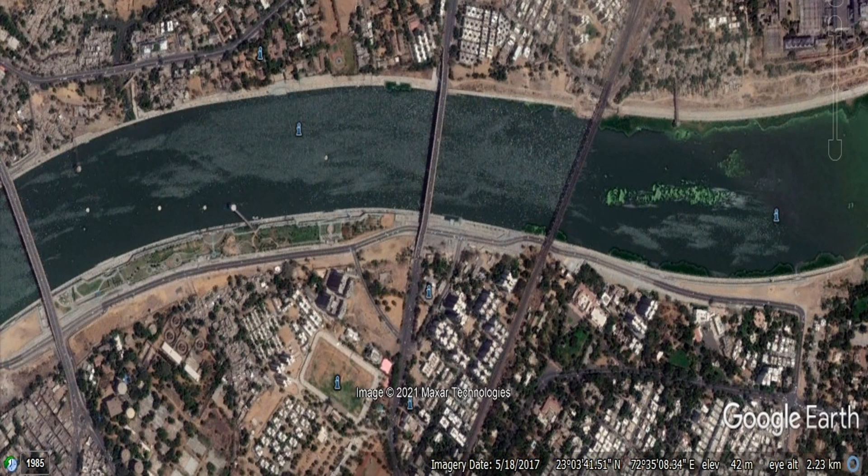Now, Sabarmati actually is not a river. A river is a water body where water flows. In Sabarmati, they have constructed a bund, a barrage here, Vasna barrage. So it is stagnant water throughout the length. It doesn't flow. And it is not Sabarmati river's own water. This water is taken by a canal on the upstream, the Narmada canal. So the water is of Narmada, which does not flow, still it is called the Sabarmati river.

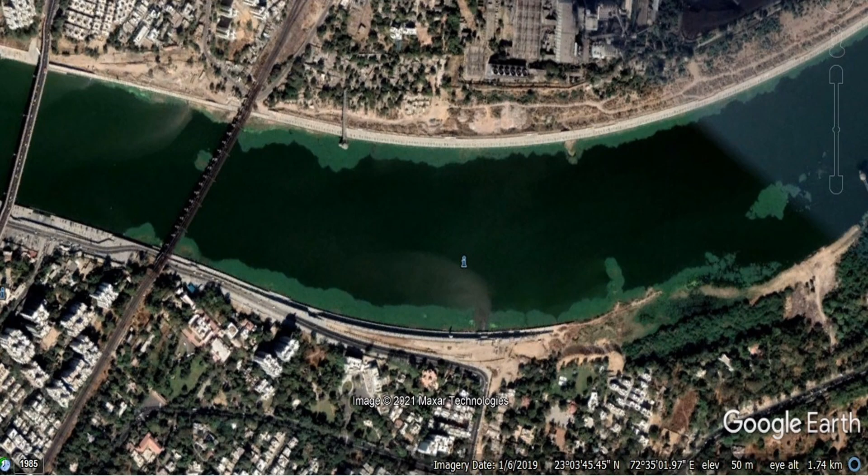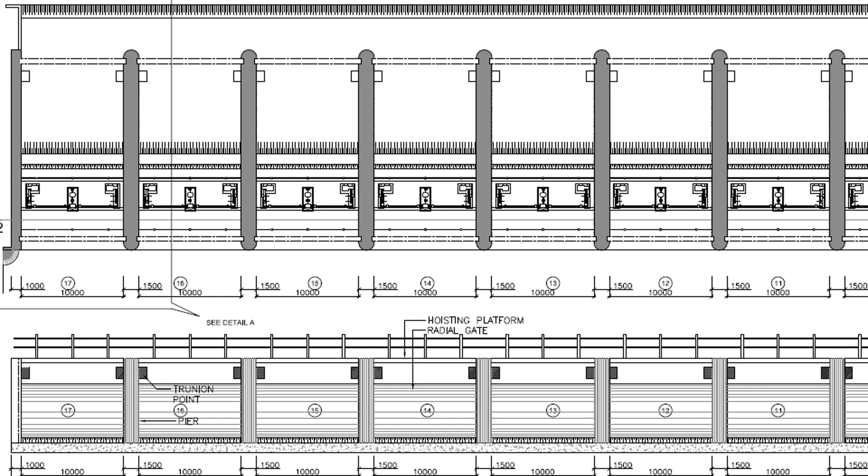See this hyacinth. It clearly indicates that there is massive pollution in the river. Sabarmati ashram is here, just upstream of the ashram. Yeah, so that's the end of it.